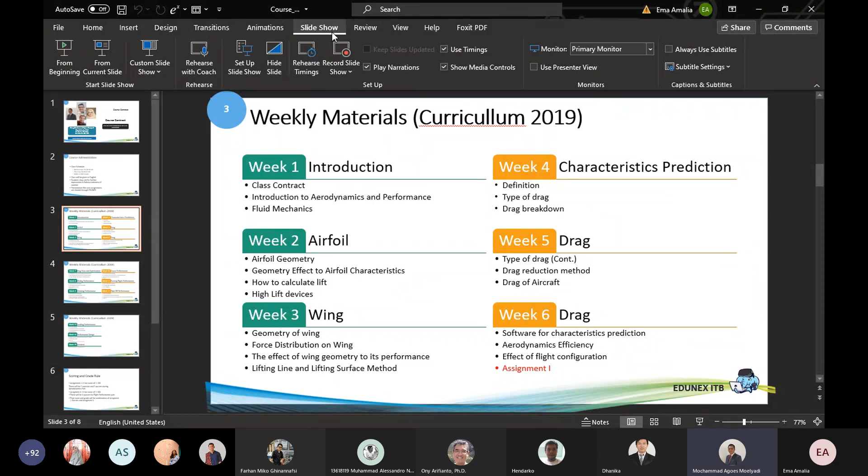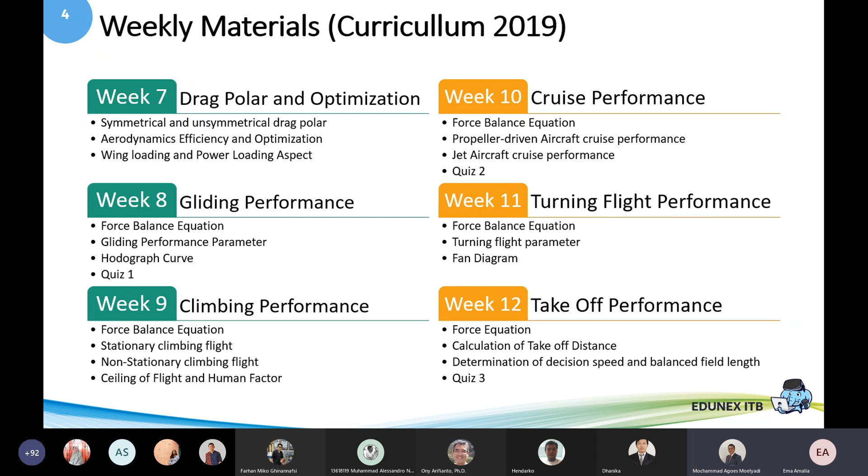Okay, this one. Yeah, next, Bu Emma. Week 7 until 15 will be delivered by Pak Ony and Pak Hendarko, talking about flight performance.

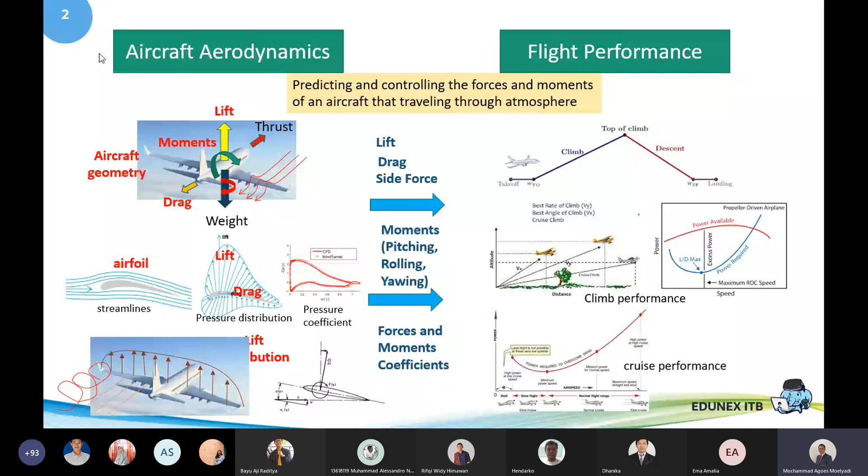Now I will explain about the story of aircraft evolution and its inventors. The development of aircraft, since the Wright brothers' invention of the tandem aircraft in 1903 - you can see this simple configuration aircraft equipped with two wings and two propellers, connected by some wiring.

In 1946, aircraft were developed with higher speed and more streamlined shapes. You can see here it still has a straight wing, for the DC-4.

Since 1969, the evolution of the aircraft becomes high speed aircraft with wing shapes having swept angles, shown by the Boeing 747, and the fuselage has more streamlined shapes.

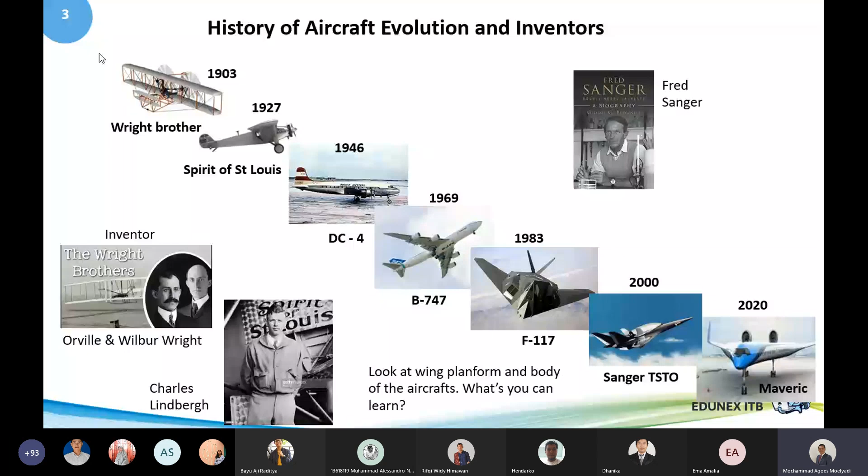Okay, these are some contributors in aerodynamics.

Sir Isaac Newton, in his time, was a mathematician and physicist who invented fundamental fluid motion and momentum conservation law, and also introduced Newtonian fluid, the relation between shear stress and velocity profile in a boundary layer. How to calculate shear stress? It's the gradient of velocity with respect to normal, times the viscosity.

Daniel Bernoulli and Johann Bernoulli in the 18th century were Swiss mathematicians and physicists. They introduced the understanding of the behavior of fluids based on internal pressure, and applied momentum principles to the infinitesimal fluid element. This is the Bernoulli equation - I think you already know this familiar concept. Bernoulli introduced the equation related to fluid flow in a fluid domain where there is no friction occurring in the domain.

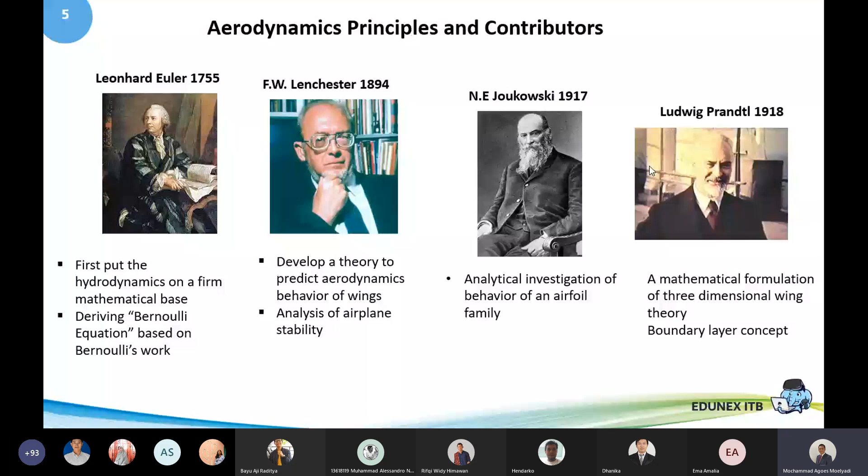Okay, that's the story of aircraft evolution and the contributors to aerodynamic principles.

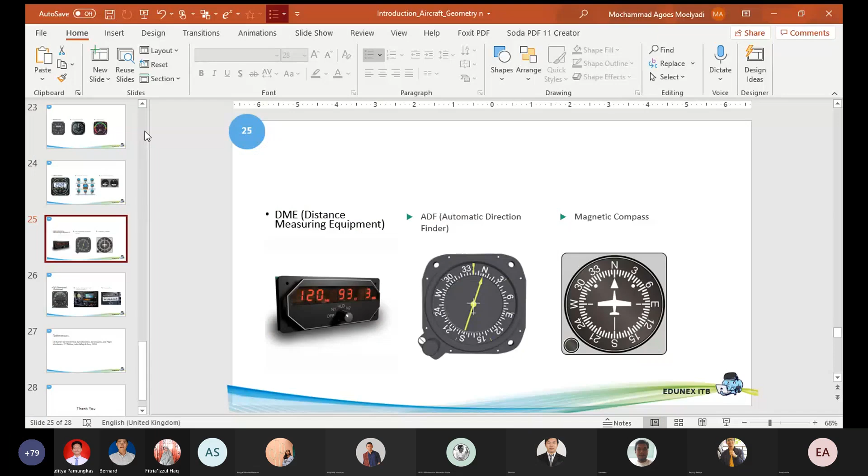Okay, we'll explain the aircraft geometry, an important part of this course. I have already explained the evolution of aircraft from the Wright brothers' aircraft until modern aircraft like Maveric. This evolution shows that the configuration of aircraft is changing with time, developed for higher speed, from subsonic aircraft to hypersonic aircraft.

Okay, I will explain the important components of the aircraft. First is the fuselage, which is to accommodate the passengers or pilots, for commercial aircraft. Then the cockpit, which is the part of the aircraft where you put the avionics system and also the pilots.

Then wings—this is the main part of the aircraft to produce the lift to overcome the weight. Most of the lift is produced by the wing. In the wings there are some control surfaces. And then the next component of the aircraft is the empennage.

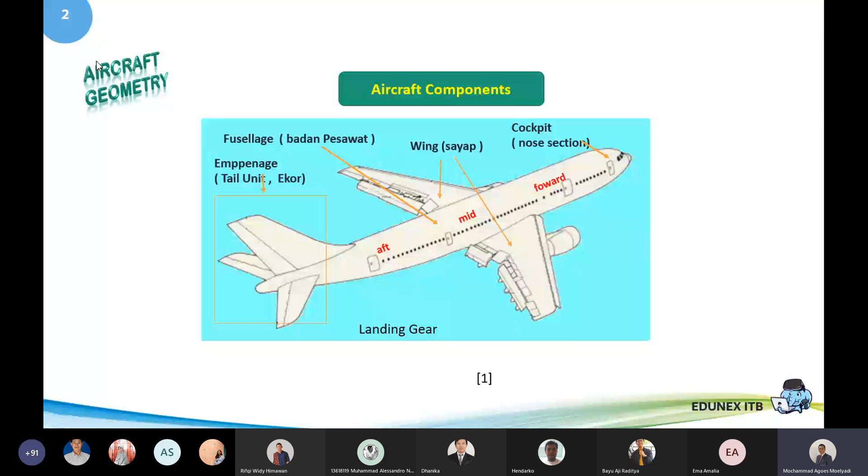The empennage consists of the vertical and horizontal stabilizer. This empennage is to control the motion of the aircraft during flight. You can see here the vertical stabilizer and horizontal stabilizer, accompanied with control surfaces, and the engines, the engine nacelle.

And some control surfaces are located on the wings. On the wings there are flaps—inner and outer flaps—and also ailerons. The function of the flaps is to produce additional lift during takeoff and during landing. The flap is located on the inner part of the wing.

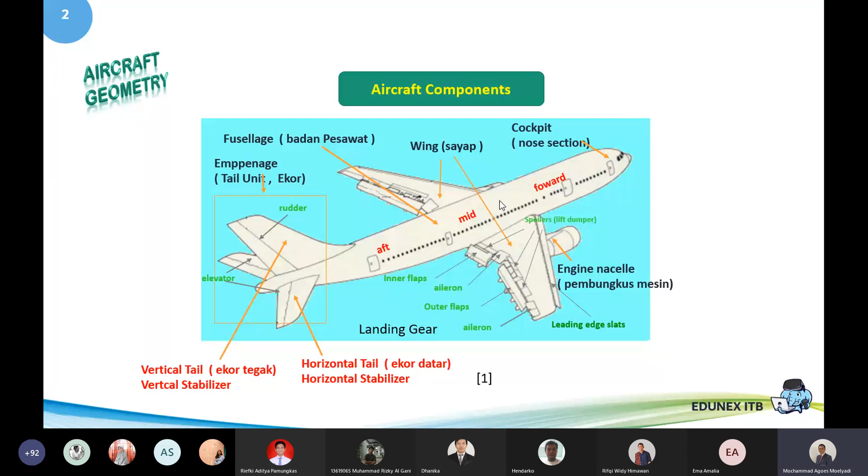Okay, that's the component of the aircraft. I will discuss in more detail about this component. First is the wing. If you look here, there are several shapes of the wing. Wing here is to produce lift to overcome the weight. You can see here the shape of the wing. The simplest wing is the straight wing. Straight wing is installed at the subsonic aircraft, the conventional aircraft, the aircraft you can see here. Usually the straight wing is used to obtain the lift for the subsonic aircraft.

And when the aircraft fly at higher speed, the shape of the wing becomes like the middle figures. They have the swept angle, swept back angle. You can see this in the commercial Airbus aircraft here - this wing has a certain swept back angle. And there's also the fighter aircraft with the forward swept wing, accompanied with the canards, canard in front of the main wing.

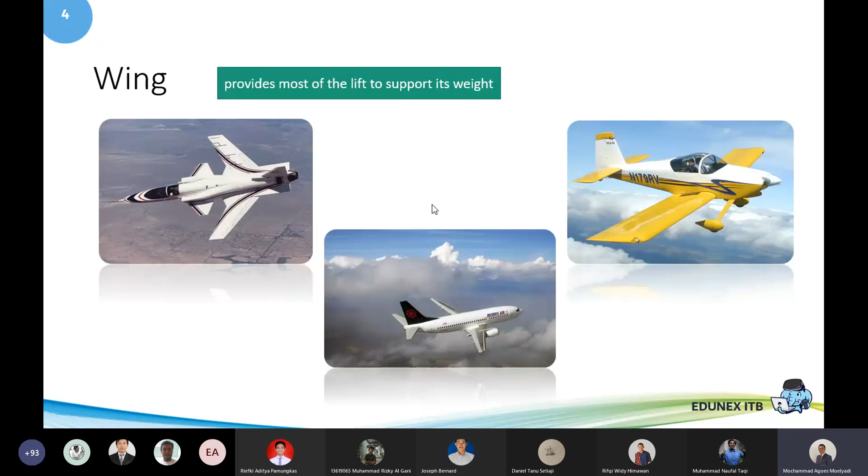Baik. Also there is some shapes for the high speed aircraft, for the supersonic aircraft the shape of the wing becomes delta wing such as the Concorde aircraft - this is a supersonic aircraft that has the delta wing shape. And also for the fighter, some fighters have the movable wing in cruise until high speed transonic - they have the arrangement of the wing in back or swept, and when in supersonic they swept back more during the supersonic flight. Could you explain, and maybe you can explain why supersonic use the delta wing such as Concorde? Maybe you can explain why delta wing is used for the supersonic.

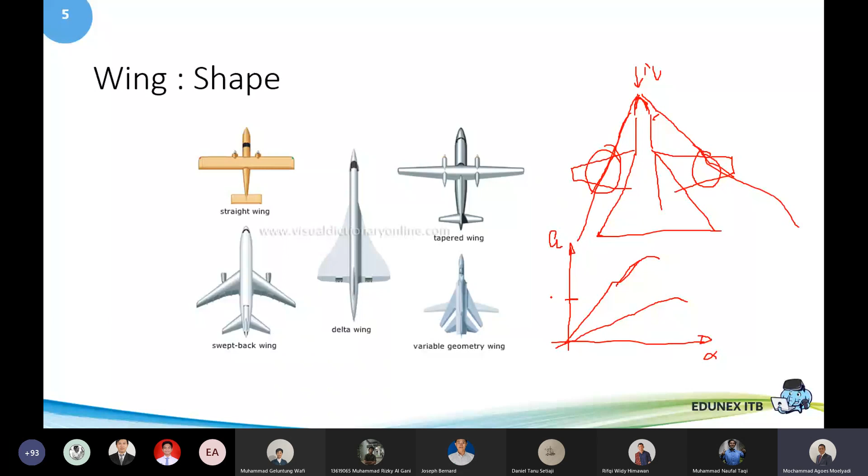So for obtaining adequate lift, for example here, this is the lift required for landing, the aircraft should have a higher angle of attack.

The angle of attack definition is: you have the aircraft, this is the body reference, and this is the direction of flight, for landing. This is the angle of attack. If the landing attitude is like this one, then it's like this one. So this is the amount of angle of attack.

So if you have a smaller angle of attack, it is not enough to lift the aircraft during landing, if the attitude of the vehicle is horizontal. So the attitude of the aircraft should have a higher pitch during landing. So during landing, the Concorde's cockpit is deflected downward, to have a wider forward vision for the pilot.

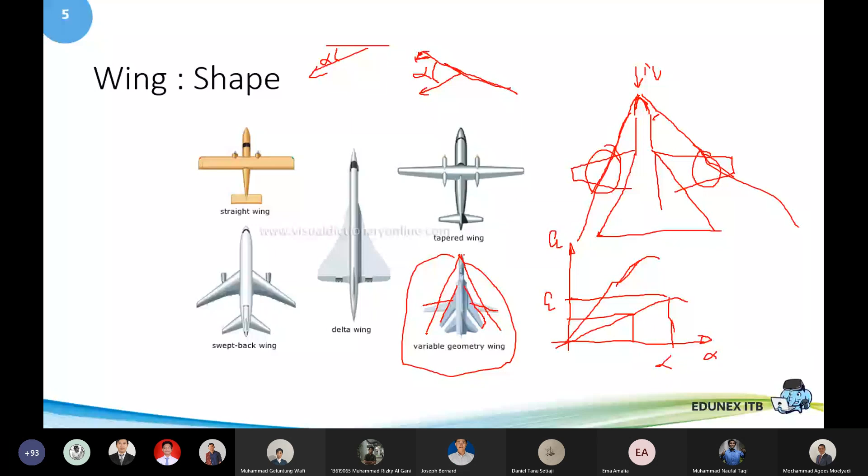Okay, cukup. We will continue with the position of the wing. There are 3 positions of the wing: high position, mid mounted, and low mounted.

There is some consideration for the high, mid, and low wing positions. This is related with the reason of selecting the position of the wing, related with the stability of the aircraft. Which one is more stable between these 3 positions of the wing?

Izin jawab Pak. The most stable for the aircraft is the high mounted wing. Why does the high mounted wing become more stable? Because its center of gravity is lower.

If there is any disturbance on the high wing, for example the flow from the right, the flow here will be divided into up and down. What happens when there is a disturbance from the right? The wing will go back, actually the aircraft will be moved to the right in rolling motion, the left wing, but the wing itself will go back to the initial, original position.

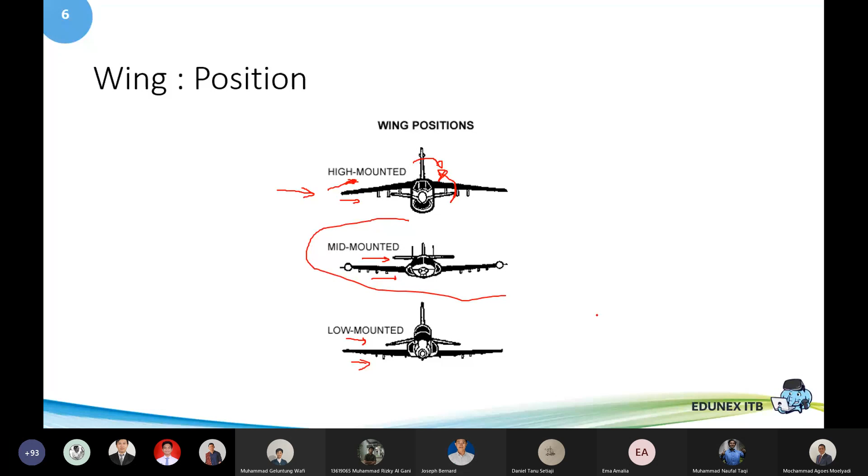Okay, I continue with the geometry parameters. This is an important parameter for the wings. First is aspect ratio, defined as b squared over S, the reference area. For example, for this aircraft, the definition of the area is shown by the blue ones, the wing region, across the fuselage part.

For aspect ratio, the straight wing will have a high aspect ratio, because in the definition of aspect ratio, b over c, if you have a large span with a certain mean aerodynamic chord, you will have a higher aspect ratio on the straight wing. But by increasing the swept angle, the length of the span becomes smaller, and the mean aerodynamic chord becomes larger. So for the delta wing, it will have a lower aspect ratio.

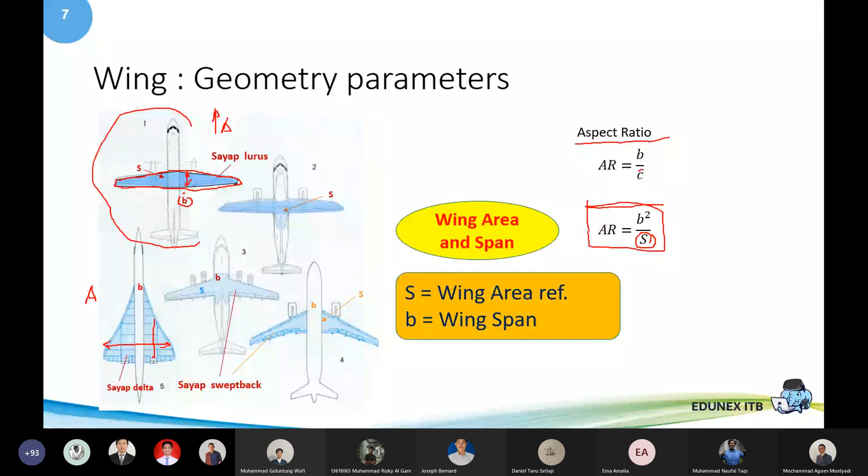Permisi Pak, izin bertanya. Silakan. Fungsinya taper ratio dan sweep angle itu apa ya Pak? Taper ratio dan sweep angle. Sweep angle, sweep back angle. Taper ratio, yeah, this is the comparison between the tip chord and root chord.

The good aerodynamic efficiency wing shape is the elliptic wing. The elliptic wing produces the minimum induced drag. So in order to approach this shape, we can use the taper ratio, which is the comparison ratio between tip and root chord. So the value about 0.3 until 0.4 taper ratio will produce a shape close to the elliptic wing.

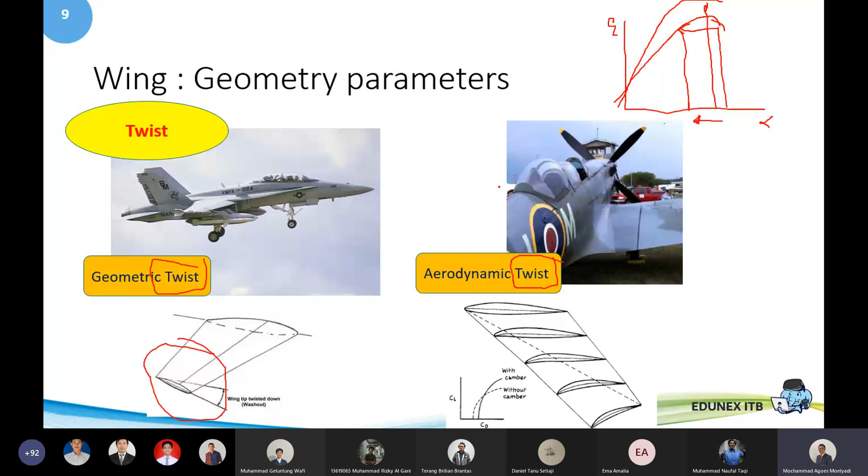Okay, any question concerning the parameter of geometry of the aircraft on the wing?

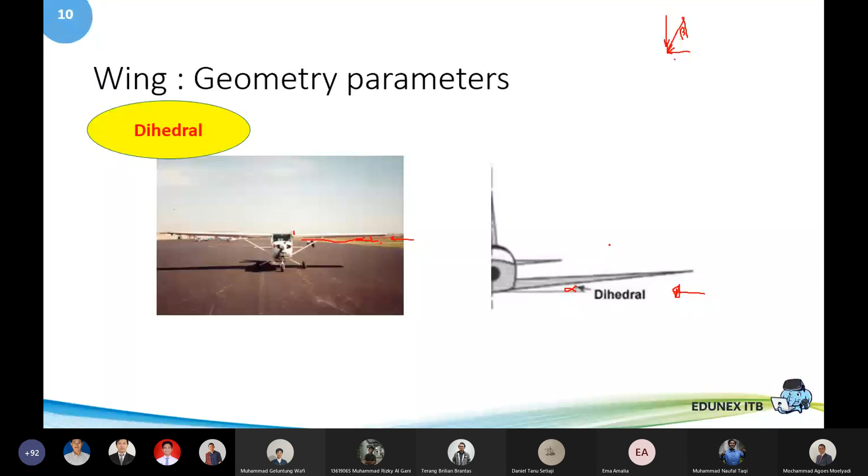Lift and drag, definition of lift and drag. Lift and drag are vectors. Lift direction is perpendicular to the wind direction or direction of flight. If you have the aircraft, the direction of flight is in that direction, so lift is perpendicular to the direction of the aircraft or the direction of incoming flow. From the aerodynamic view, the flow is incoming to the aircraft, and the lift is perpendicular to the direction of the flow.

The drag is parallel to the direction of flight or direction of the incoming flow. The angle of attack is the angle between the body reference chord line with respect to the direction of flight. And this is angle of attack.

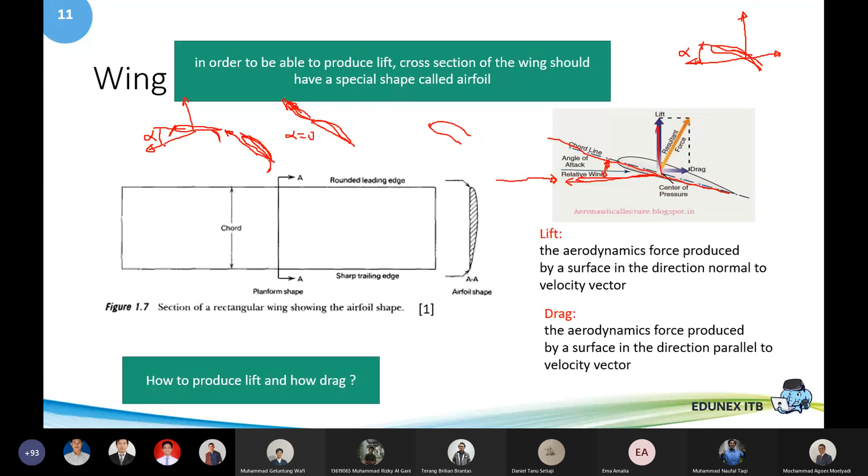This is the wing two-dimensional lift coefficient. For the two-dimensional, you should write CL with small l, yeah, small l. For three-dimensional, C with capital L. On the aircraft you write it like this. On the airfoil you write the lift coefficient C with subscript L.

So the lift coefficient of the airfoil is lift divided by half density V square. This density V square term, we call it dynamic pressure. Dynamic pressure times area, but for two-dimensional, area is represented by the chord length. Dynamic pressure times the chord length gives CL. This is the characteristic of the airfoil, CL alpha.

You can see here, on the symmetric airfoil, at zero angle of attack, the flow incoming through the upper and lower surfaces travels the same distance. So the pressure distribution on the upper and lower surface is the same, and at zero angle of attack, the lift equals zero. By increasing the angle of attack, the upper surface has minimum pressure and the lower surface has higher pressure, so we produce lift. By increasing the angle of attack, the lift increases.

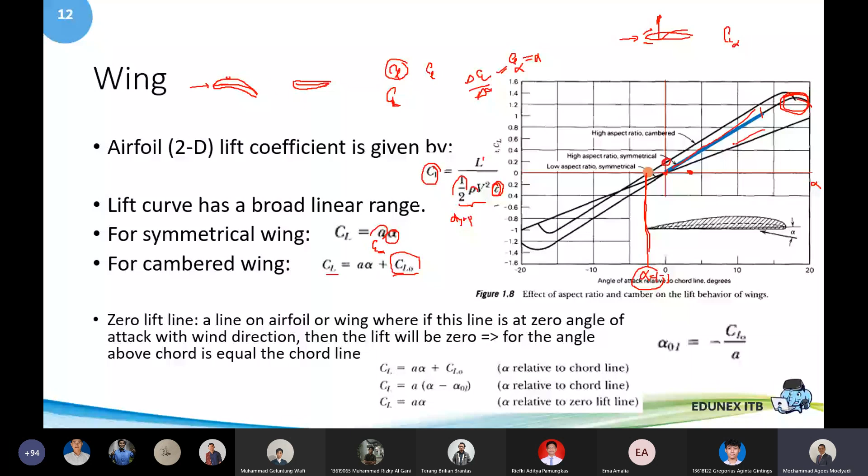Empennage is the tail assembly of the airplane which consists of the horizontal tail and vertical tail. The purpose of the empennage is to provide stability and control of the airplane for both pitch and yaw.

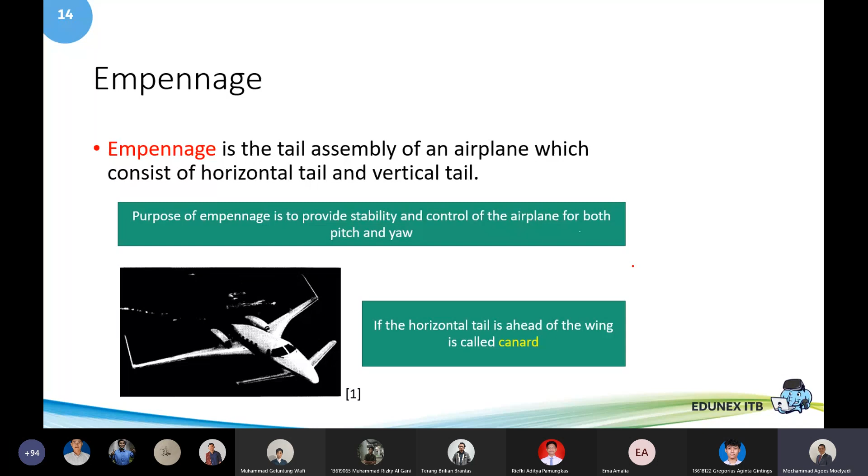T-tail, the aerodynamic center, located compared to the CG - the aerodynamic center compared to the CG will have a distance in the vertical direction. So it will produce a moment, since the drag acts in that direction, it will produce the moment.

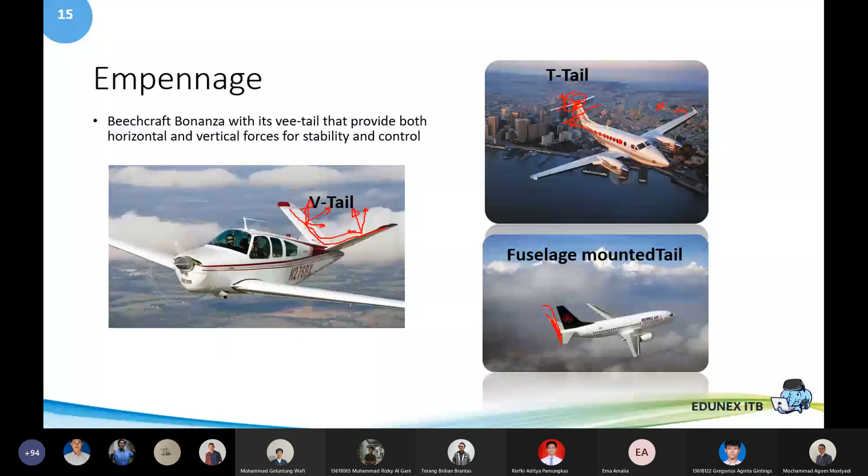Okay, canard - the canard is located in front of the wing. The canard can be all-movable, to produce stability and control. The advantage of the canard, if we put it higher than the wing, is that it will produce a tip vortex.

This tip vortex occurs above the wing and will benefit the lift of the wing, producing more lift when the induced vortex flow occurs in the upper region of the wing. This is why at higher angle of attack it is still stable using the canard, because it produces additional lift on the wing.

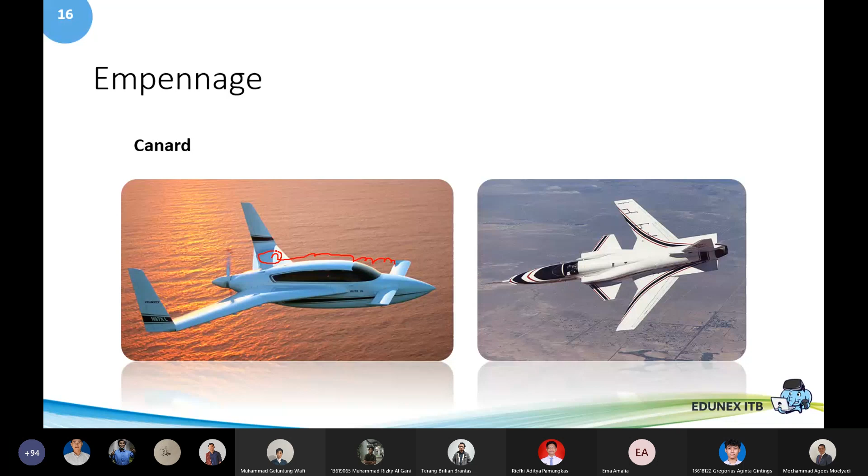Okay, and minutes - what time is it now?

15 minutes more. The horizontal tail consists of a fixed part and a movable part, which we call the elevator. The entire horizontal tail contributes to stabilizing the aircraft, but only the elevator provides control of pitch. So the control surface for pitching moment is the elevator.

When the elevator is deflected down, it will generate lift upward, which with respect to the CG will give pitch down - this lift, when deflected down, with respect to CG will produce the nose-down of the aircraft. But if deflected up, it will produce nose-up.

Vertical tail - the rudder controls the motion. This is the rudder. The rudder position here will produce a side force. When deflected to the right, it will produce a side force, which with respect to the CG will produce a yawing moment.

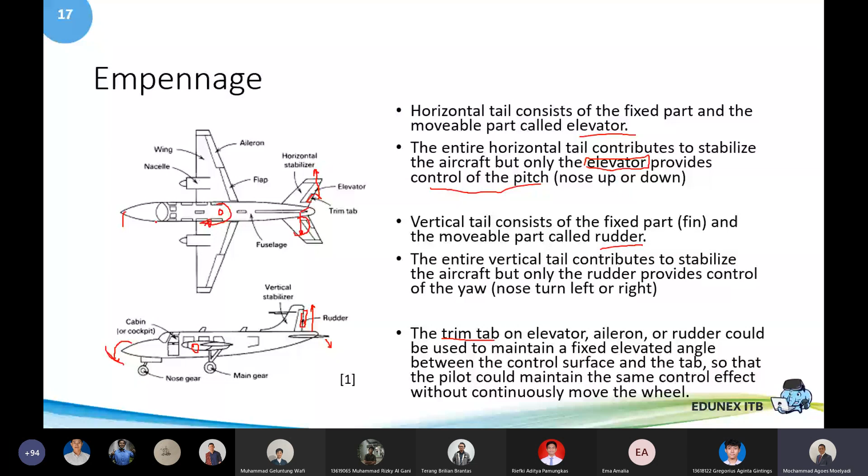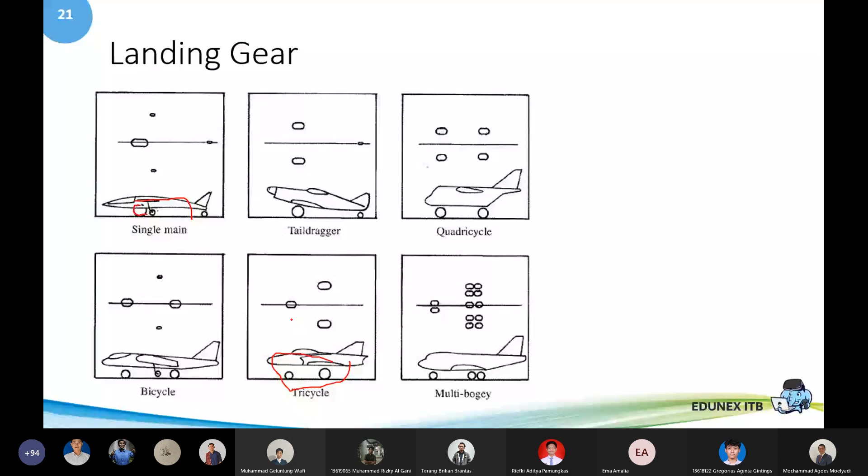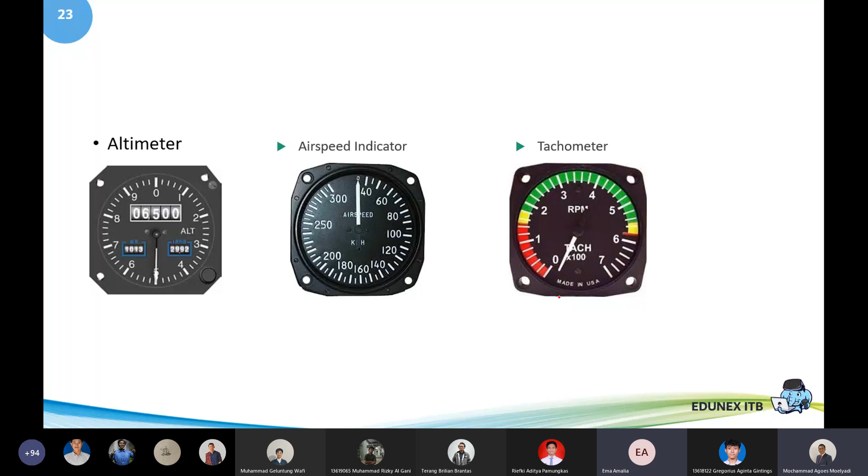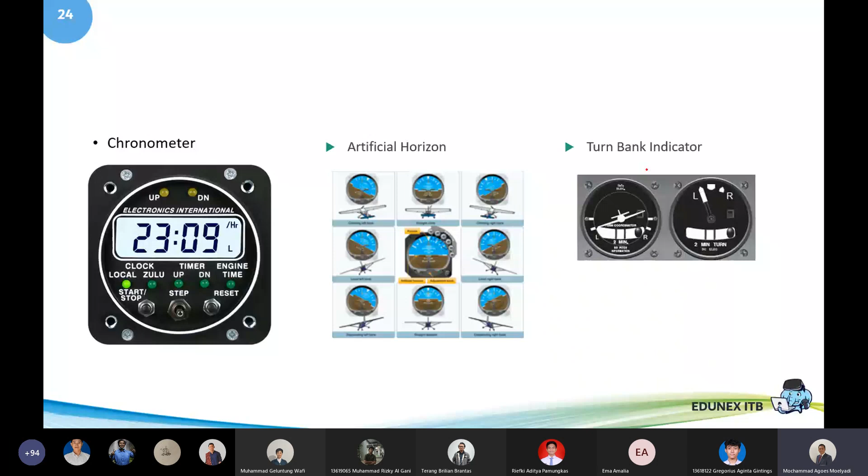Okay, there are some instrument panels used in the aircraft, such as the altimeter for altitude, airspeed indicator for measuring airspeed, tachometer for engine RPM and propeller, chronometer for determining the time, artificial horizon and turn-bank indicator using a gyro device, DME for measuring distance from the aircraft's position to the ground, automatic direction finder for the direction of the aircraft for navigation, and the magnetic compass.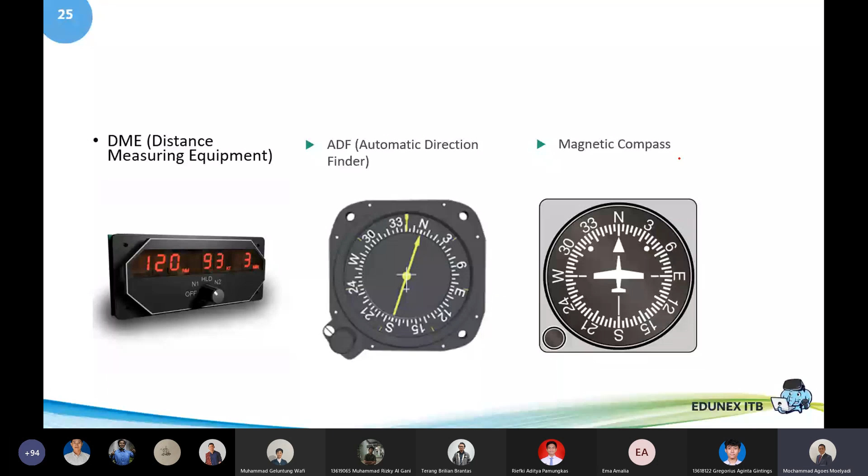Okay, I think that's enough for today. Any questions?

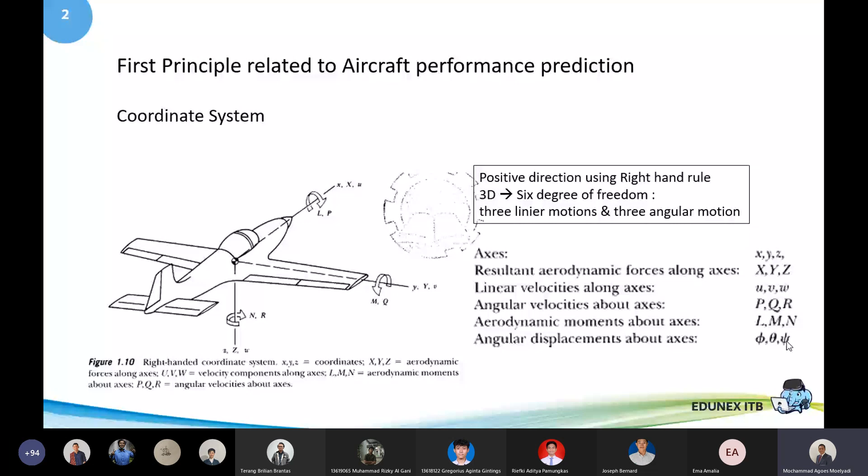Okay, there's some symbols, some parameters used for the axes here. The axis uses small letters X, Y, Z, and the forces use capital letters X, Y, Z. The linear velocity along the axis uses small letters U, V, and W, and the angular velocity about the axis is capital P, Q, R. The aerodynamic moment about the axis is L, M, N, and the angular displacement about the axis is phi, theta, and psi, and so on. So the aircraft motion has 6 degrees of freedom, 3 in translation and 3 in rotation. Rotation with angular rates about the X, Y, Z axis is called rolling, pitching, and yawing moment. The rolling moment is produced by the control surface of the aileron, the yawing moment by the rudder, and the pitching moment by the control surface of the elevator.

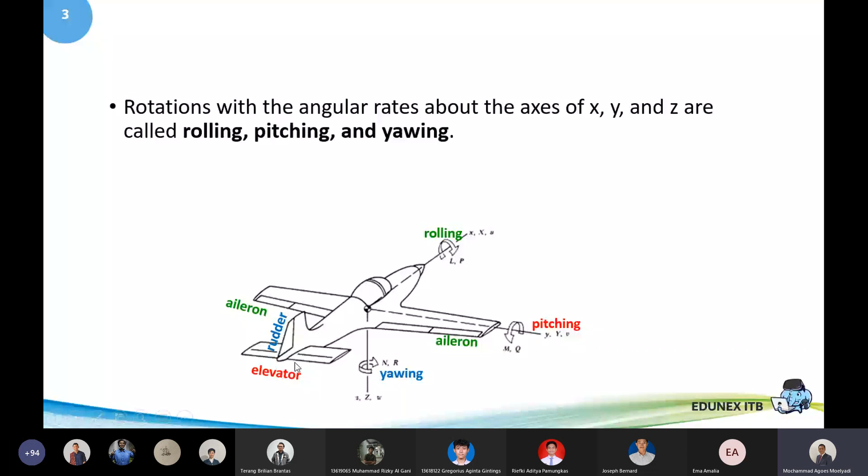Okay, the analysis of aircraft motion can be split into two modes: longitudinal motion and lateral directional motion. In longitudinal motion, the aircraft motion is in the plane of symmetry - linear motion in the X and Z axis, with rotation about the Y axis. So you will have motion in the X direction and in the Z direction, in translation.

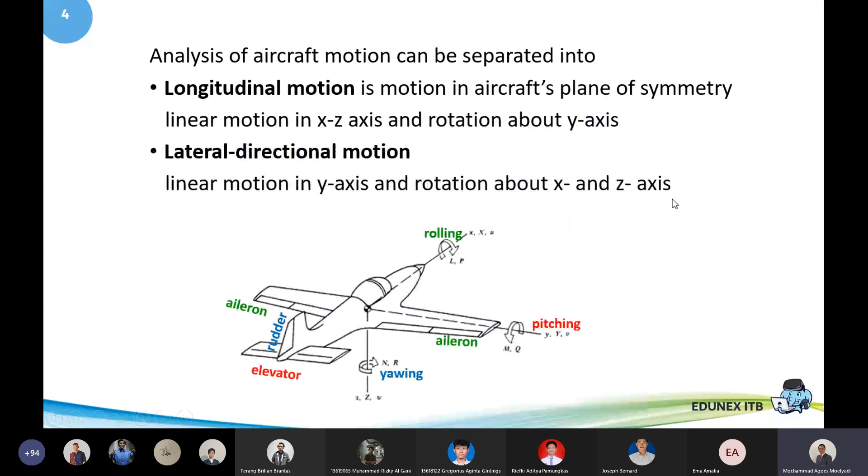Lateral motion - linear motion in the Y direction, Y axis, and rotation in the X and Z axis. Okay, I think it's enough for today, I stop here, because it's already 5 o'clock. Thank you very much, okay I stop recording.